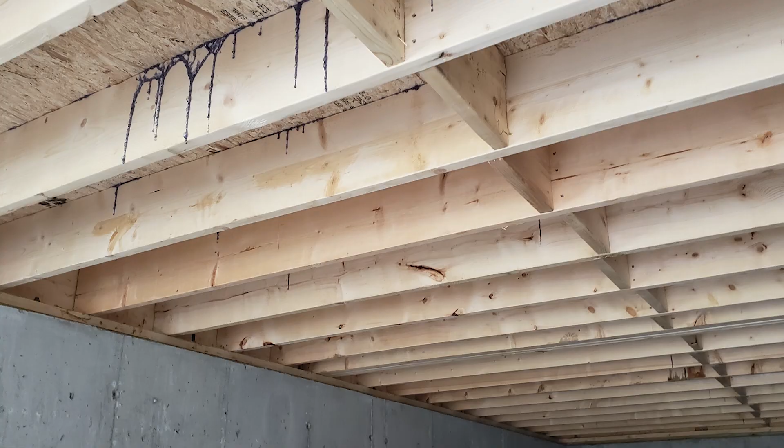Today we're going to talk about floor framing. I've talked about it a number of times, but we're doing it old school, where we're using solid sawn joists. So these are 2x10 joists. We chose to go to them because this isn't a very large house where we're looking for large spans. We'll talk about some of the framing and how we manipulated that, but also the cost of getting the 2x10 versus engineered joists. It led us to the 2x10 being the best choice for this particular job.

When you look behind me, you'll see there's a large LVL beam that runs down the middle of the building, certainly intentional. It's got the lolly columns equally spaced, splits the basement into two. It's very traditional building style. I believe the house is like 22 feet wide, 24 feet wide. So we get those two 12-foot spans, more than adequate for the 2x10s.

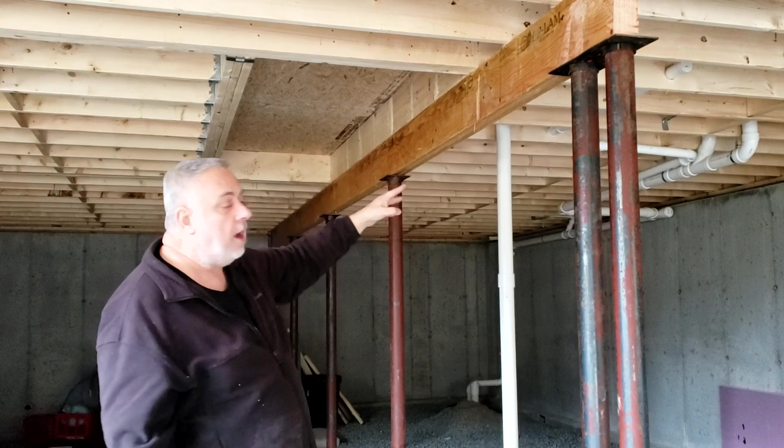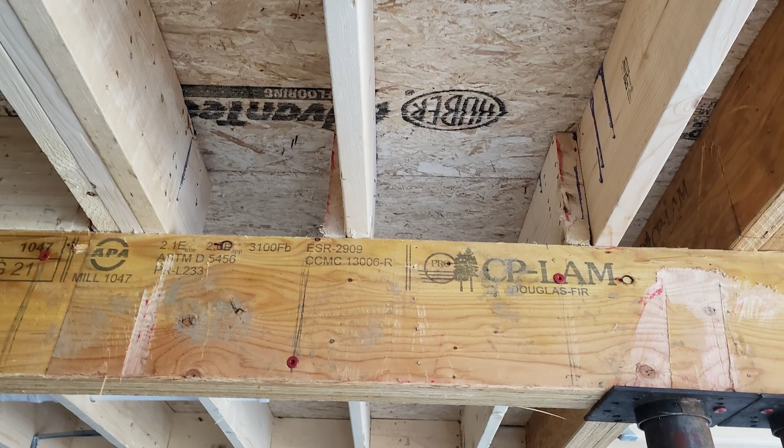You can see they lap real simply over the top of the LVL. The LVL is dropped intentionally so that it offers that joist space. So if we had to move plumbing or HVAC across from that side of the basement to this side, we can effectively use it by coming over the top of that beam.

Now, one of the other things to point out, you see here this big opening that's covered up. When the homeowner actually lives in here, it won't be covered up because we're gonna have a beautiful staircase that comes down to some spaces in the basement here. So the builder just temporarily put the floor sheathing on there to cover it up so they can work and nobody falls through. It's a safe practice.

But you can see here, the 2x10s, we actually had to triple up the beam there, and then we pull the triple here that goes to a triple over there. So that is what carries these floor joists because they can't go all the way to the LVL. We have to bring that load path over to the LVL on that triple 2x10.

Now, what that allows us to do is have this nice big opening for the stairway. The stair is going to come down, and you notice this floor framing is spanning in that direction. But when I come to the bottom of the stairs, it switches to this direction. Now you might say, wouldn't it have been easier to just carry that beam across and run the stuff continuously in that direction? Yeah, it would have, but the homeowner wanted to have a nice big room here at the bottom of the stairs. So we switched the direction of the floor joists.

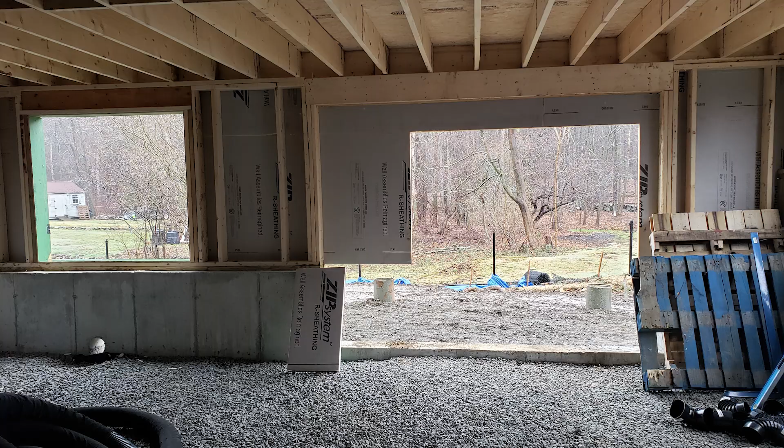We stopped the columns here, and now that gives them this 14-foot by 24-foot room that has walkout capabilities out to the outside there. So let's go back to the studio. We'll break out the floor framing plan and talk a little bit more about it. We'll see you back at the studio.

Hey everybody. So hopefully you enjoyed that trip out there we took. Project Green Logic Builders doing a great job. Floor framing, there's all kinds of decisions to be had there, and believe it or not, some of those decisions are tied to function as well as the budget and a whole bunch of things.

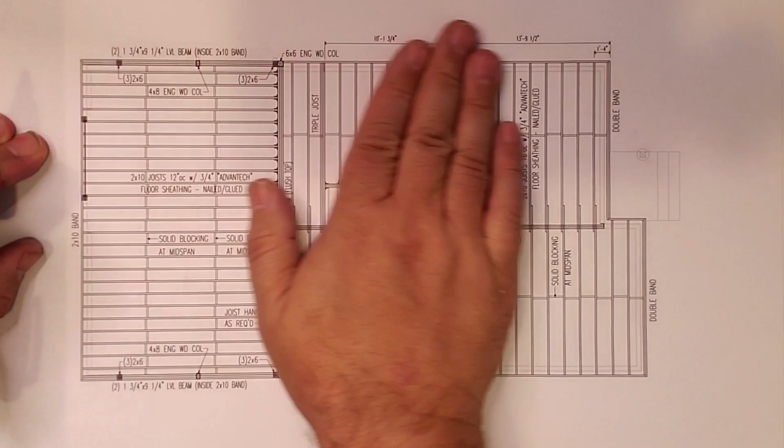So anyways, got Big Red here. We got the floor framing plan. Let's dive in and talk about some of those decisions. All right, so here is the floor framing plan. I stripped it out of the drawing set to give you a little reference. This is that stair opening that I spoke of, and right down there in the basement, shooting a video, probably standing somewhere right there, talking to the camera. So you can see it's a pretty simple floor framing plan.

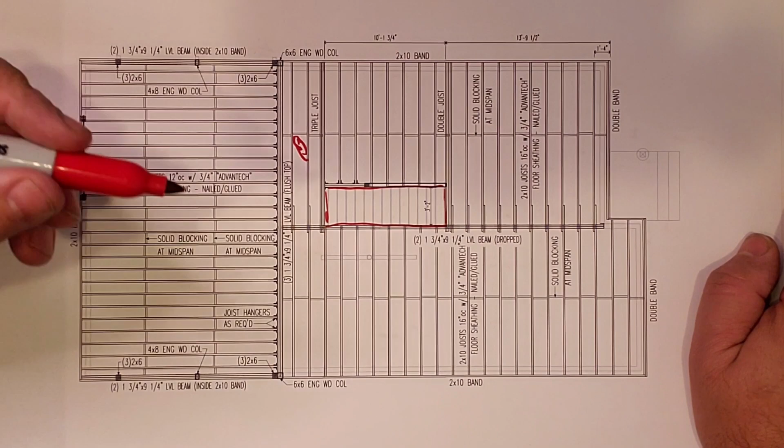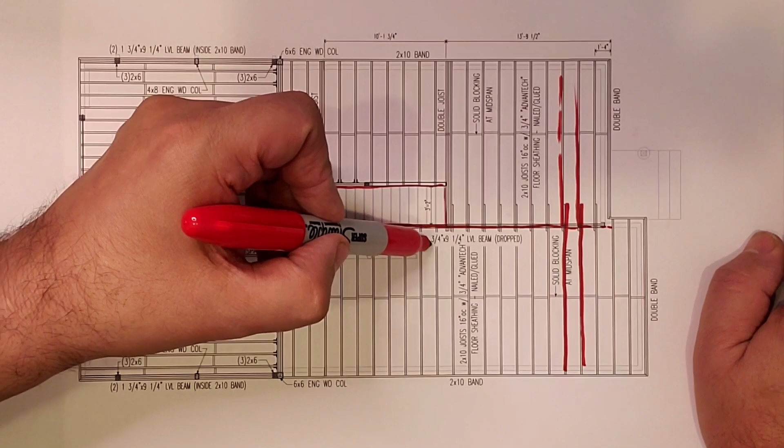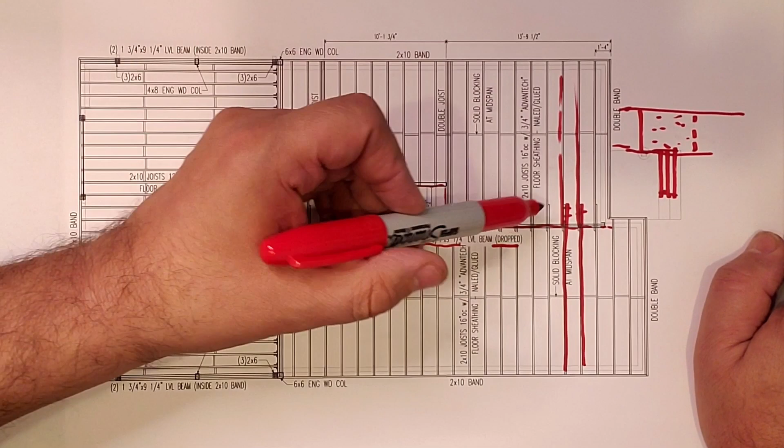There's not a whole lot of magic, but that doesn't mean there's not decisions to be had. So when we look at this, we see there's 2x10 there, and 2x10 there. This one comes down, and then they lap over this center beam. We have that beam called out here - it's two 9¼ beams, and they're dropped, meaning the beam is down here and the floor joists run over the top of it, lapping there. That gives them the ability to shoot a bunch of nails in there and connect those. But by having that dropped, it allows ductwork to run over that beam in that joist bay, so if we wanted to run the main trunk, we could run it down here.

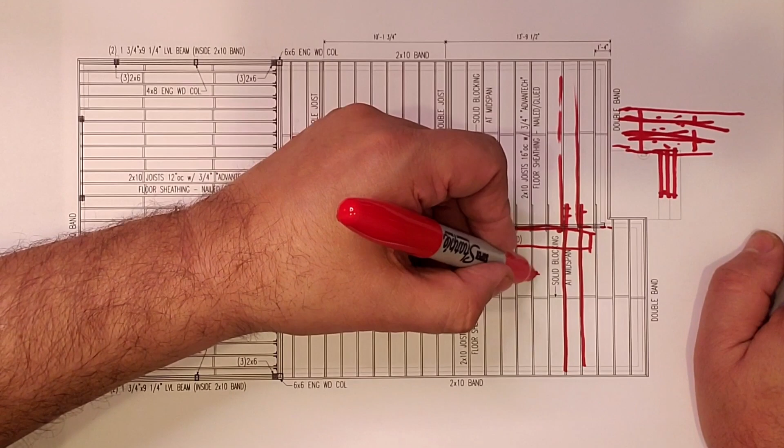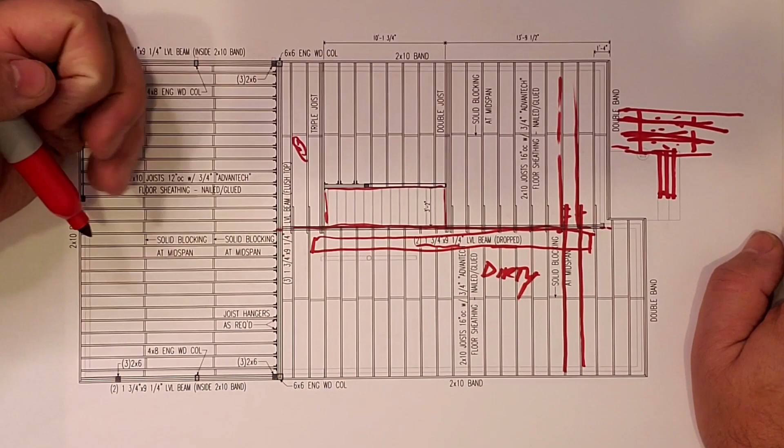This is what I'd consider the dirty part of the basement. Remember from a few videos ago where I talk about clean and dirty basements - the dirty is storage, mechanical space, stuff like that. Not that it's physically dirty, it's just we have a bunch of plumbing hanging down from the ceiling. We have a couple bathrooms here and here, so that plumbing's dropping down, traps and all of that, so if I were to finish off this basement, this would be the primary space to finish off.

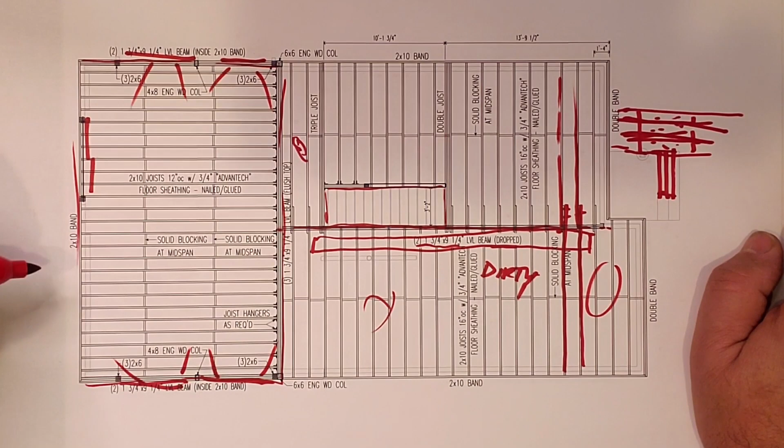And the reason for that is we have the lift and slide door there, and two beautiful windows here and two beautiful windows there that would flood this space with light and make that a real pleasant place to be, as well as give us access to the outside and the patio and all of that good stuff.

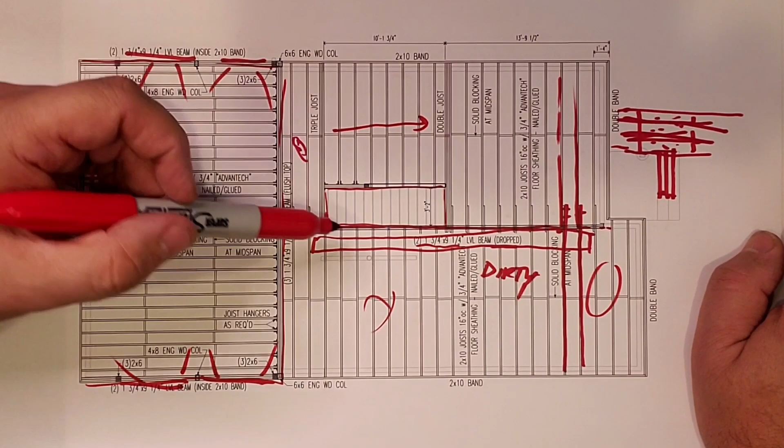So we'd finish this, and if we wanted to continue finishing it, we would migrate in that direction from here and finish off that piece. And this section here, we would just retain as the dirty section of the basement, for mechanicals and storage.

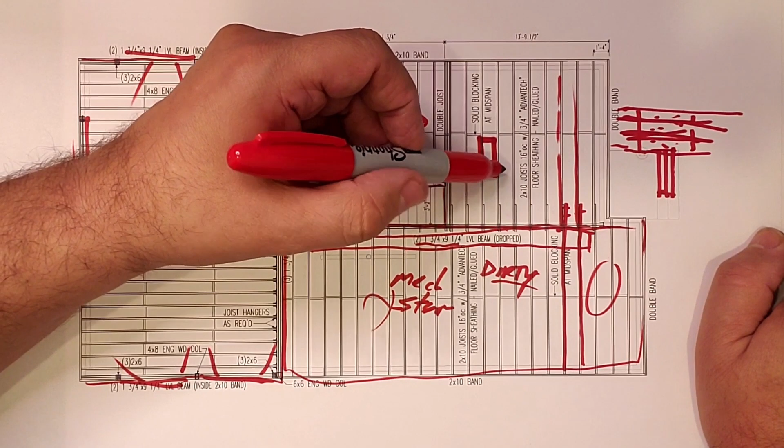So you can see the function of these spaces plays a role in a bunch of the decisions with the floor framing, dropping the beam, running the floor joists over it. The fact that these are 2x10s means they're a solid piece of wood. And the beauty of that is when they're subjected to a fire, the flame kind of rolls around the side, chars the corners, and really maintains structural integrity in the center of that floor joist for a decent amount of time.

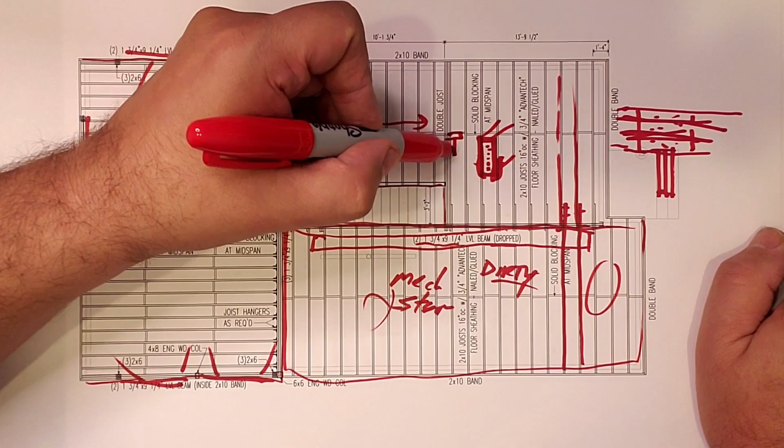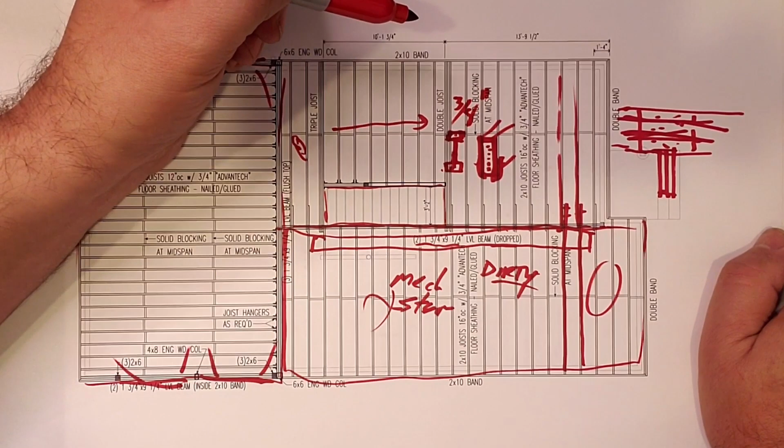Now compare that to the standard I-joist, where it has a plywood or OSB web that's countered with a top and bottom chord of either LVL or solid 2x. That little web there is probably on the order of about 3/8 of an inch, and that's really susceptible to a very quick failure in terms of a fire.

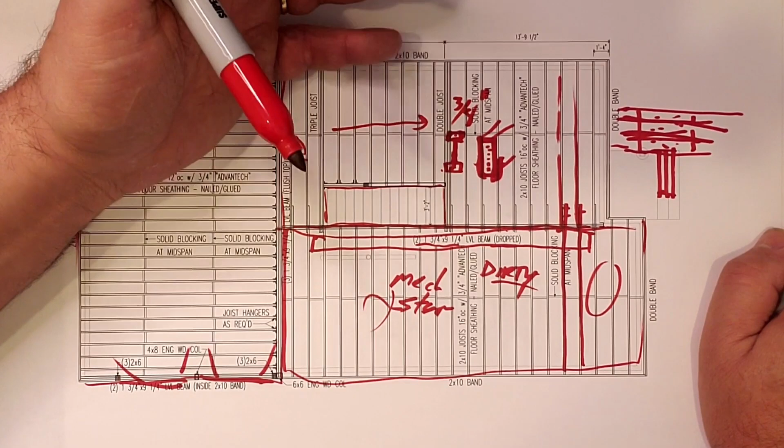And so, it's not so much that the 10 minutes or whatever makes a difference in saving the house, though that would help. It's more about the firemen as they go into the house to assist people if need be - that the house stays intact for a decent amount of time so they can do their job without it almost immediately collapsing. So if you use the I-joist and we don't finish off the space, and there's no plan to finish it immediately, that's a future endeavor.

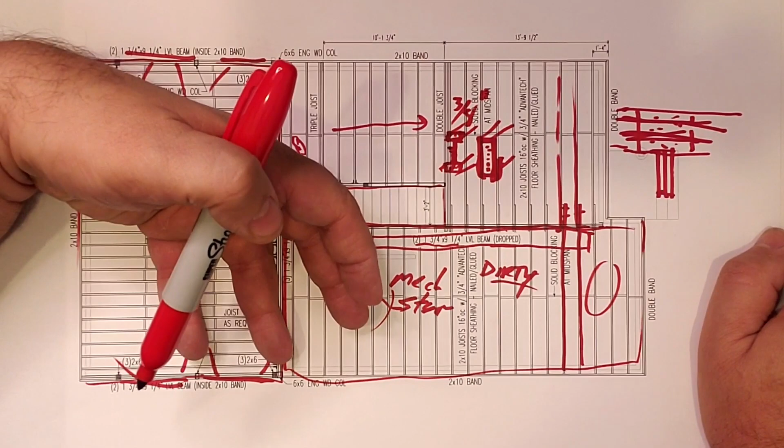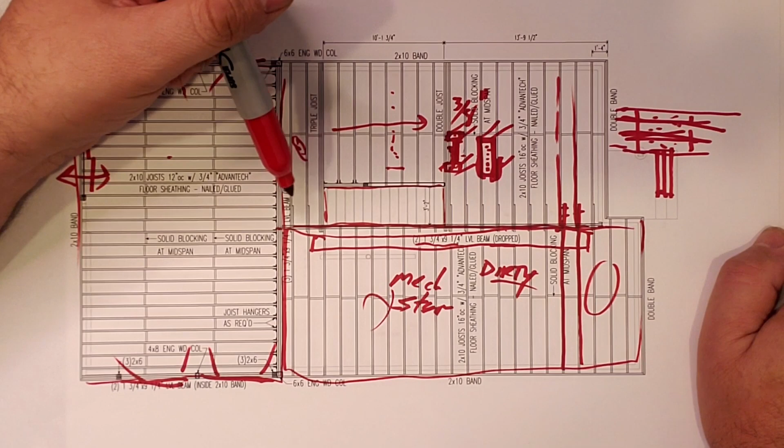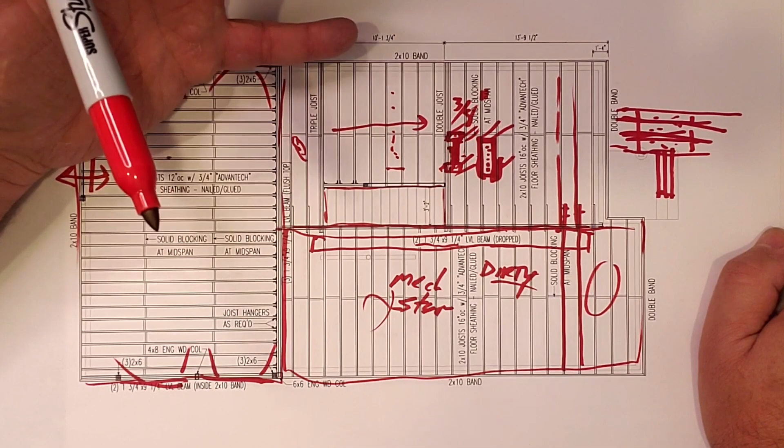If we went with the I-joist, we'd have to either put some insulation in this bay, Safe'n'Sound, to protect it and basically fire block, or we'd have to do some type of fire armor on the I-joist. The fire armor is stuff applied at the factory on the I-joist so it's basically a protective covering applied to that 3/8 inch web to protect the I-joist from very quick failure in a fire.

So anyways, moving down, we drop that center beam.

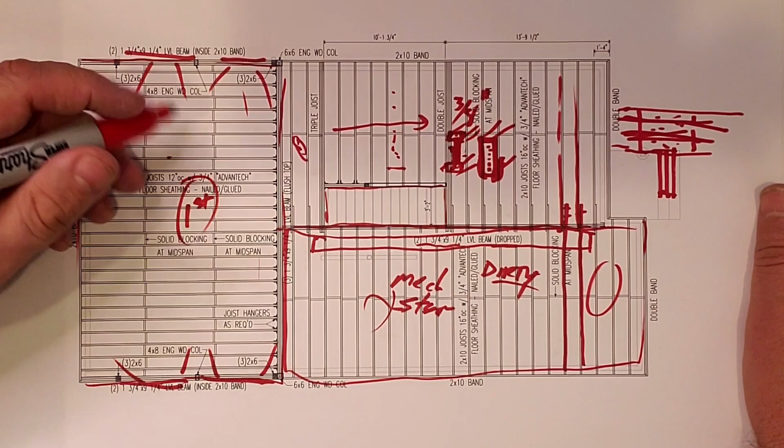Because this area here is desirable to be the first selection as finished space in our future phasing, we have the stairs here that come down, framed by that triple there and a double joist, and then we have a bearing wall to pick up some of those joists. The last section has a beam because we wanted the ability to have an open handrail there.

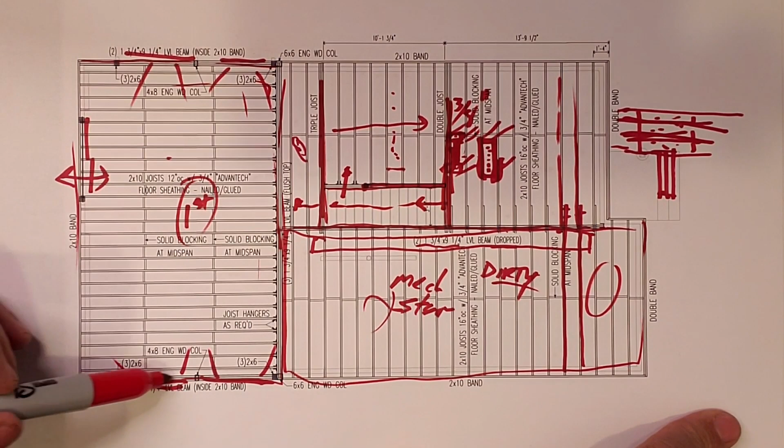As you come down the stairs and take a couple steps, you're going to be in this somewhat very large room. The beauty of that is we stopped that dropped beam there, changed direction, and put a beam line in here. Doing that allowed us to rotate our floor joists and get them going in this direction.

So what did that do for us? It provided this space here at about 15 feet by 28 feet - just a really great space, a really good sized room. As far as the house goes, it's probably around 30-35% of the floor plan, so getting that as one big open room was a huge bonus.

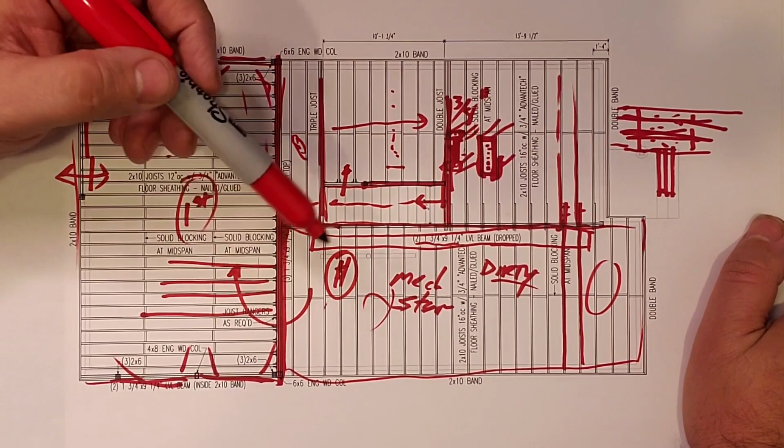The idea that we were using 2x10s kept the financial part of the budget in check. 2x10s are simply a much more financially friendly solution to floor framing than some of the others, and this is conducive to being used in this house because the spans are relatively short - you're not talking anything but 14 footers, 15 footers. So it makes for a pretty easy floor framing plan.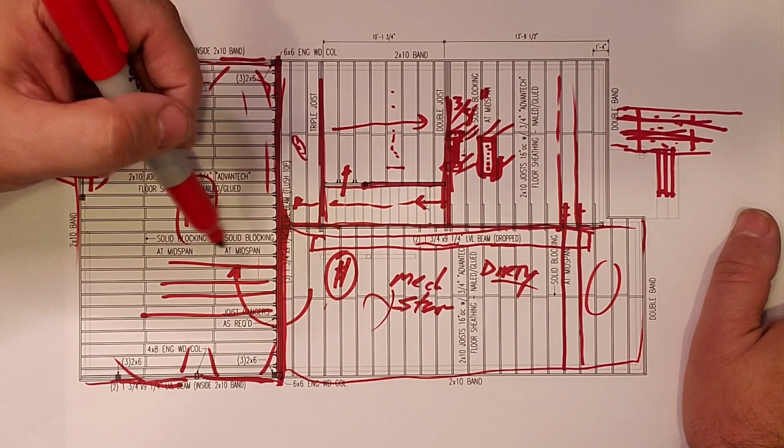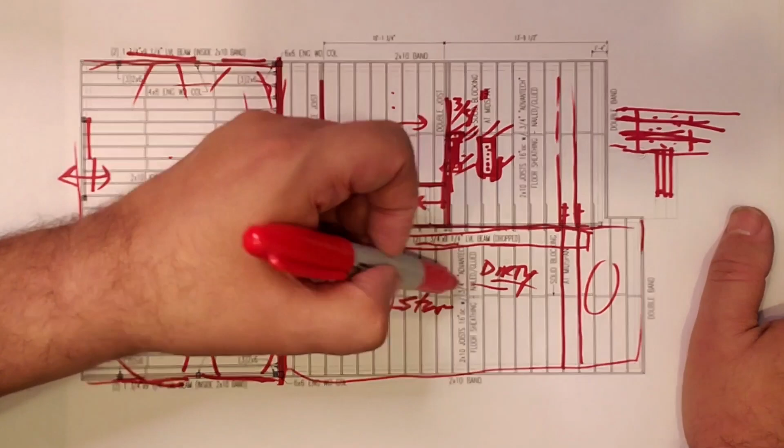But it's not always just about the dollars, or 'hey, I'm a 2x10 framing fan' or 'I'm an I-joist fan.' It's about understanding the relationship of the spaces we're putting in here. What are their function? What are the aesthetics of it? Where are we going to have dirty basement, where are we going to have clean basement where we don't have stuff under it?

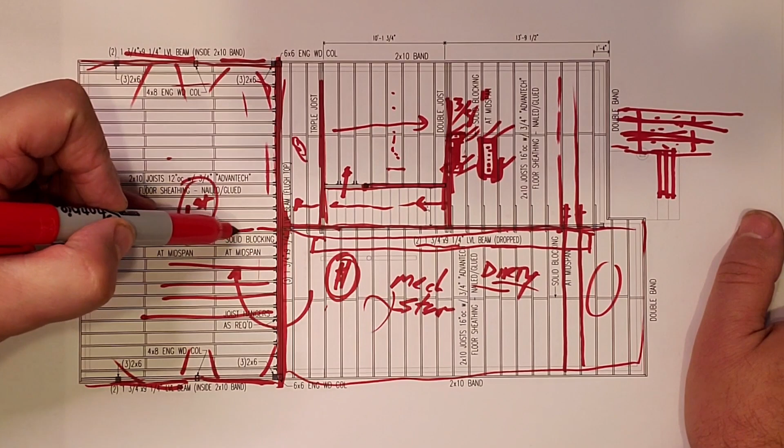In the floor plan above, there's no bathrooms or anything up here - it's all down there. So it really set us up for an understanding that this has the potential to be this really great room, and we didn't want to have to run that beam through it and visually divide this space into two because we had this 9 1/4 inch beam sticking down into that basement space.

So by switching the joist, it keeps everything up above the level of the bottom of the floor joist and gives a nice uniform ceiling in that large room. Lots of windows flood the room with light, we get access outside, and even in a modest house like this one, we extract as much as we possibly can out of the system to work in our favor.

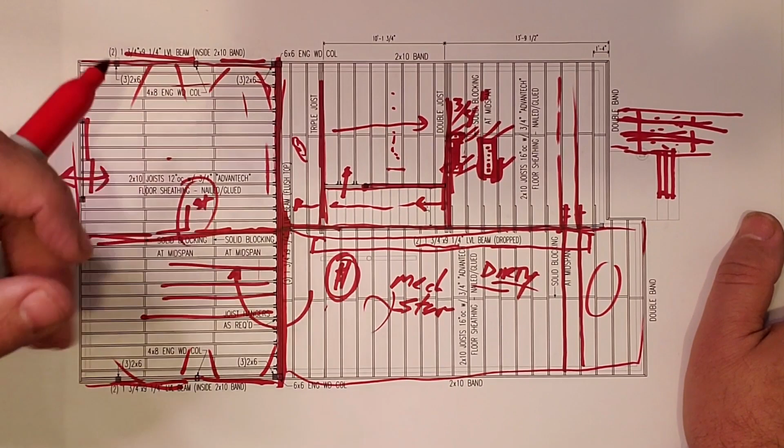So anyways, hope you enjoyed that. That's a 2x10 floor frame, simplified, and some of the decisions behind it. So there you go, all right.

That about wraps up floor framing decisions. Anyways, hopefully you enjoyed that. It's conventional platform framing, but I think we illustrated it in a way that shows you don't just go out there and lay out floor joists and go have at it. There's a lot of decisions to be had - how the rooms function underneath those floor joists, direction of floor joists, all that good stuff.